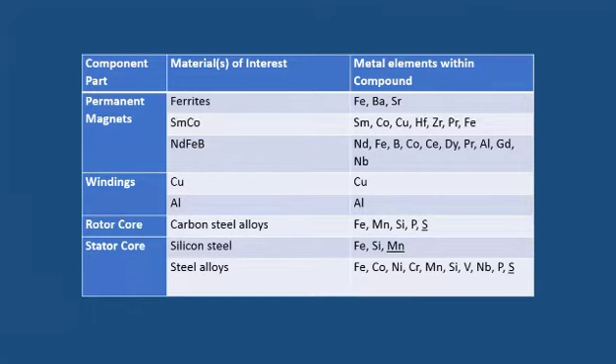There are many components within a PMEM, as well as fixings, adhesives, and so on, but I'll be going forward concentrating primarily on the active components of the electrical machine: the stator, rotor, coils, and magnet. These components can require up to 22 different elements extracted from the earth within their manufacture, and each face many of the same issues, which were uncovered in part 2 of the research.

What is the current life cycle for PMEM components? Looking at the life of the PMEM, it is a typical cradle-to-grave linear process. This comes with its own issues almost all the way from birth to death of the machine. I viewed these with a consideration towards sustainability. Firstly, the machine is not generally designed with the end of its life in mind: how to repair it, how to easily replace parts, or how to recover the materials.

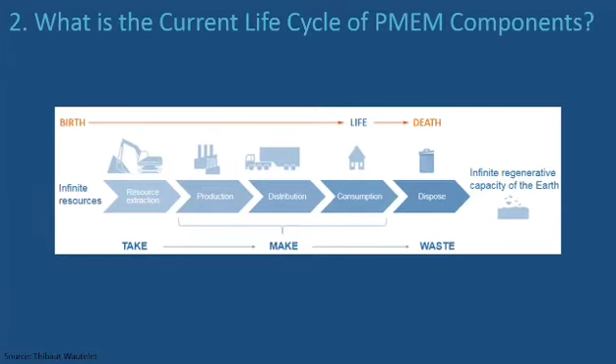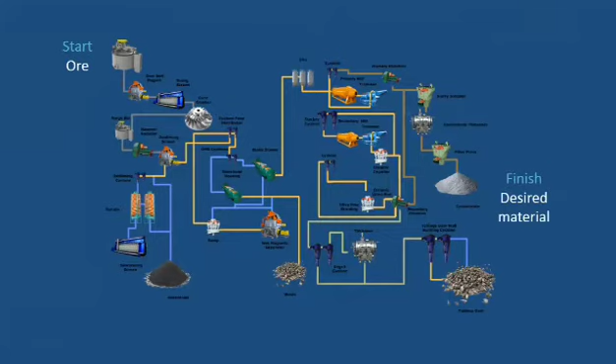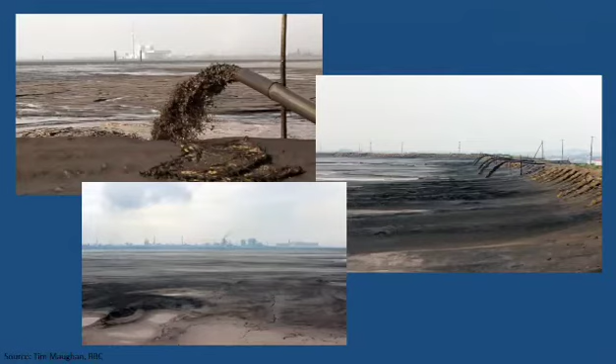These photos were taken 5 years ago at the man-made toxic lake in Bayan Obo, China. It is an extensive area in which up to 45% of the world's rare earth elements are mined from, as well as over 1 billion tons of iron. Neodymium found in permanent magnets is often sourced from here.

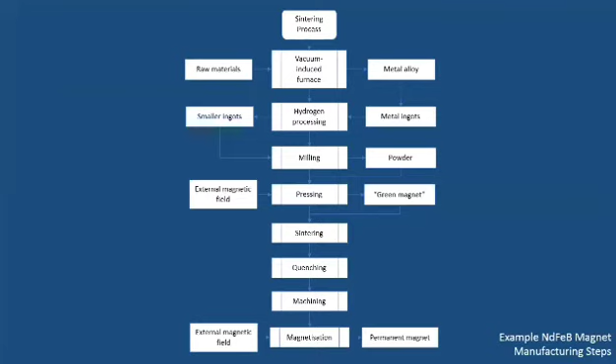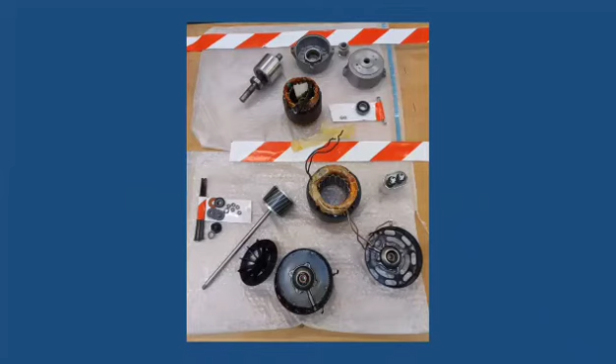To then make actual product components from these individual metals again requires multiple manufacturing steps. These components then need to be assembled and transported worldwide to the required locations. The products are typically used for an approximate 8-year service in a car and 20 in a turbine. At the end of their life, the lack of foresight at the design stage makes these challenging to disassemble, which can result in the machines then being considered as waste.

I feel this process answered half of part 3, why is sustainability important to PMEMs? By putting this process at the forefront of our minds, we can see that the manufacture of these machines has an obvious, quite extensive impact on the environment, which we are not generally privy to. Ultimately, the drivers for sustainability in this area should be to make the sustainable products sustainably.

By that I mean the goal for us, almost globally, is to move forward into a future where we run on electricity, produced not from finite materials from the earth in the form of fossil fuels or coal, but instead by harnessing the power of the wind, the sun, and the tides. The issue is that we are using finite material from the earth to create the products in order for us to stop performing the exact same action with fossil fuels. It is oxymoronic and demonstrates perhaps that this sudden drive to push this newer technology forward hasn't been thoroughly thought out. The reason for the drive to electrification is because various countries are pushing forward with energy targets, carbon targets, sustainability targets, and so on.

The UK has the Climate Change Act 2008, and Scotland subsequently has the Climate Change Act 2019, which is full of, as the government states, ambitious targets. It even states that our contribution to climate change will end definitively within 1 generation.

In theory, it sounds great, but it essentially means we're pushing ahead with things like electrification at a fairly substantial rate in order to reach these targets that we've self-imposed. The problem with this, though, is that whilst we here in Scotland and indeed the UK will soon benefit from the products themselves if we don't already, the carbon footprint from the manufacture doesn't count towards our targets because they

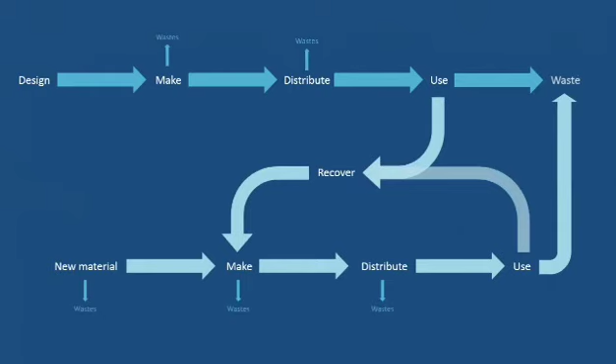feel the effect. A review of current literature reveals that there has been success in remanufacturing and recycling permanent magnets, in particular, from materials reclaimed from waste products. This is an area I'm still researching and hope to conclude by the end of 2020. However, in order to be truly sustainable, we must aim to do better and reduce the waste almost entirely, which leads us on to the circular economy.

Circular economy is a relatively modern approach for businesses which moves away from the linear take-make-waste approach, which the PMEM manufacturing process currently is, and aims to recover as much energy and material as possible in manufacture. The idea is to reduce, if not eliminate, waste, that once materials enter the cycle, it is difficult for them

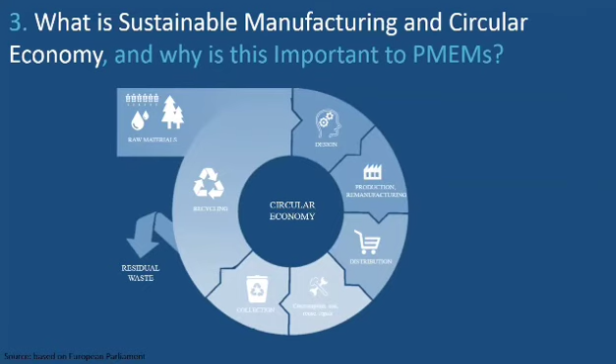to leave as waste. It is based on the premise of having limited resources from our planet and how to effectively manage those resources, removing the concept of disposability, but in fact taking responsibility for our consumption. Since the 1960s, there have been several authors and thinkers who have built upon the premise of how to cycle Earth's natural resources. Subsequently, there are different approaches to the framework and indeed different terminology used throughout the last half-century.

This has resulted in there being no one clear definition of the concept, and that in itself is posing an issue. Although the general consensus is on the same road, without a definitive definition, the concept is open to interpretation and misapplication. Another issue with circular economy, in my view, is that it is romanticised in a sense. It is to achieve perfection, which in honesty is probably out of reach for the foreseeable future, and almost certainly in the 25 years we have until the Scottish climate change target.

Some authors tend to gloss over the implications of trying to implement their version of circular economy for businesses, and it is a bit of a chicken and egg conundrum between the likes of how to power your factory using solar panels and wind turbines, whilst the manufacture of these products themselves does not still fit with the circular economy ethos. This leads to the intention for my research.

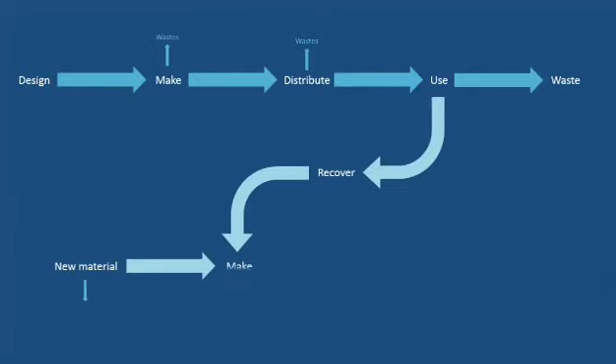Initially, it was to try and fit the manufacture of PMEMs as closely as possible with the circular economy concept. However, I now think I'll be developing a stepping stone framework to allow for the realistic, attainable target to improve sustainability in this area, whilst also allowing it to apply to an alternative supply chain for PMEMs here in the UK. This framework will be specific to this sector, encouraging movement towards entire circularity.

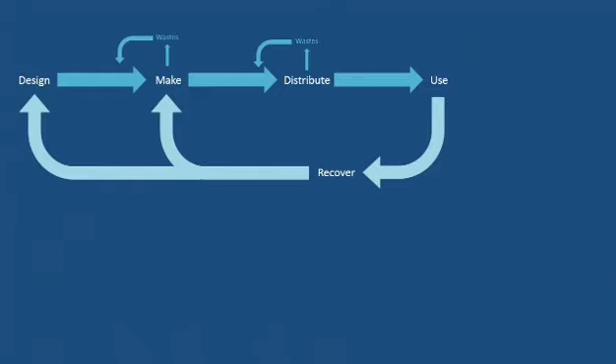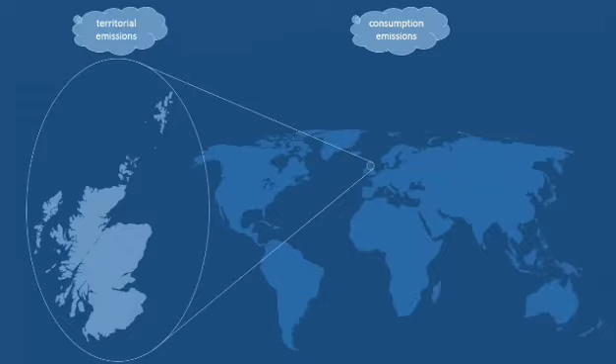By doing so, our emissions are no longer consumption but are territorial, meaning we will be held more accountable for what we need, whilst also increasing our domestic manufacturing and processing sectors, not to mention the benefits to the environment. To achieve this, I've laid out 3 research objectives for the coming year.

Firstly, to research current efforts relating to the recovery of end-of-life PMEM components and subsequent reuse, remanufacture and recycling methods for these parts. As previously mentioned, this I hope to conclude by the end of 2020. Secondly, to determine the potential viable solutions for PMEM components in line with the circular economy ethos.

And thirdly, to develop a supply chain which could be implemented in the UK with novel approaches to the recovery and reuse of permanent magnet electric machine components, whilst fitting as closely as possible with the circular economy concept.